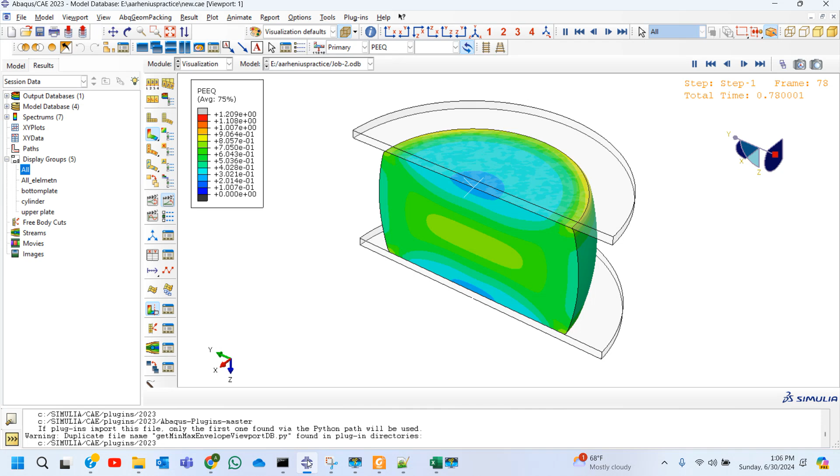Hello, this is Arsalan. I'm back again with a new project on modeling isothermal hot deformation behavior of any metal or alloy using a numerical approach based on VUHARD subroutine.

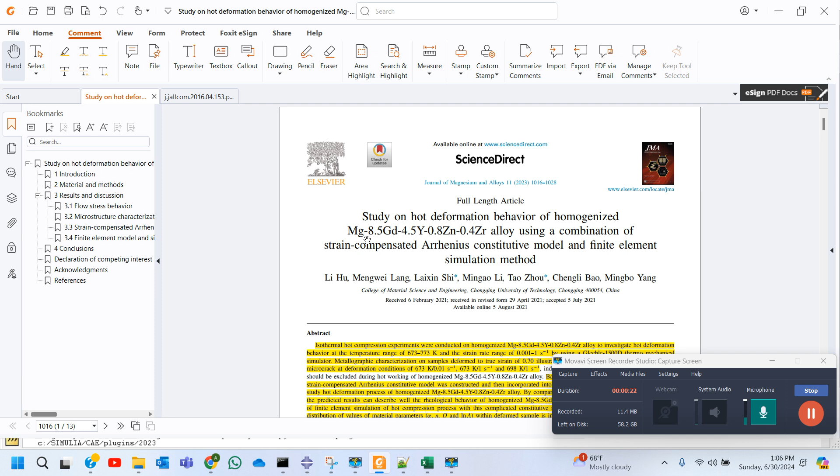So this is a reference paper that I'm using, and this is also a second reference paper that can be used to study the model. We all know that metals and alloys at high temperature experience some sort of strain softening as well as temperature softening. In order to model this temperature softening and strain rate softening, there is a model which we usually call the strain-compensated Arrhenius model.

This model is basically used to model the hot deformation behavior of any metal and alloy based on the strain compensation method. In this study, experimentally this can be modeled using a Gleeble 1500D thermo-mechanical simulator. And in ABAQUS, through numerical simulation, we have used a VUHARD subroutine, and the detail of this VUHARD subroutine is as follows.

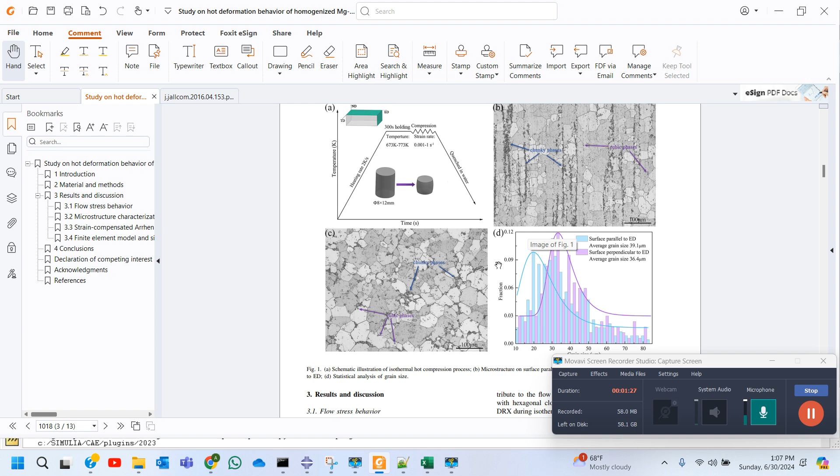That's why we need some sort of model, whether it is a Johnson Cook type that we need to modify, or we can use the strain-compensated Arrhenius model, which is already a validated model for modeling hot deformation behavior. In order to validate the study, first of all, we have made an Excel sheet. In the Excel sheet, we have entered all the formulas for the modeling. The values of these formulas all depend on the strain. So it's a strain compensated model.

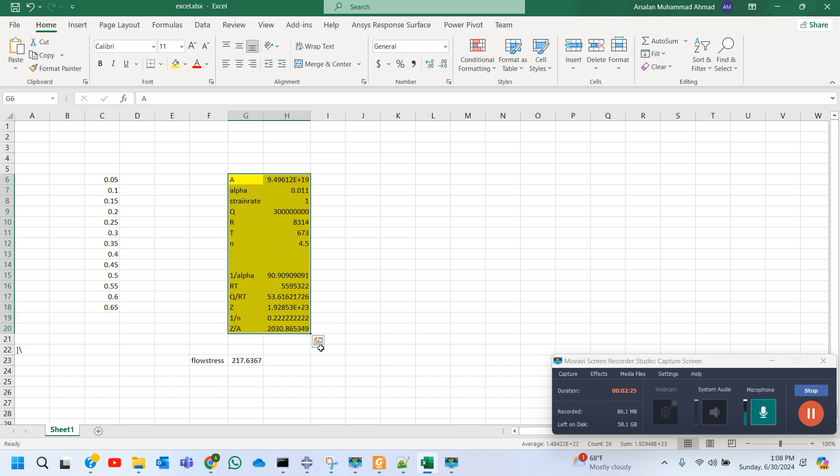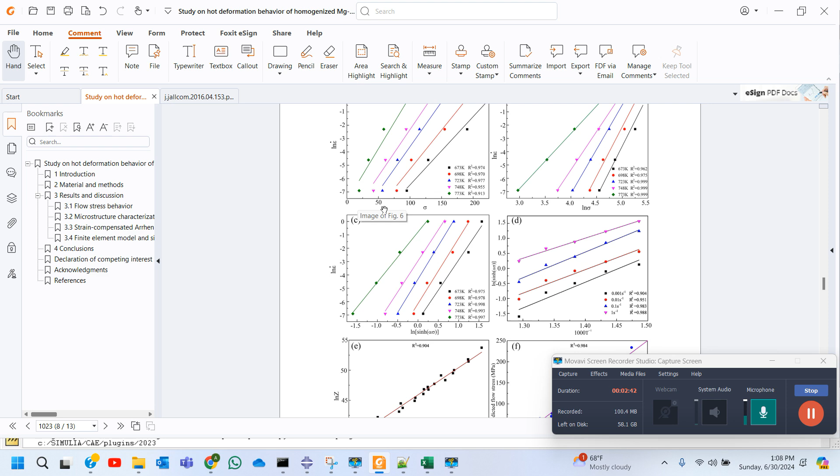So we need to measure all these parameters individually for different strains, and then check the flow stress behavior. In the next stage, you can see that this is basically the Arrhenius model, and in the Arrhenius model you have to find the values of all the parameters, like log of strain rate as a function of stress, n as a function of true strain, alpha as a function of true strain, Q as a function of true strain, and ln A as a function of true strain.

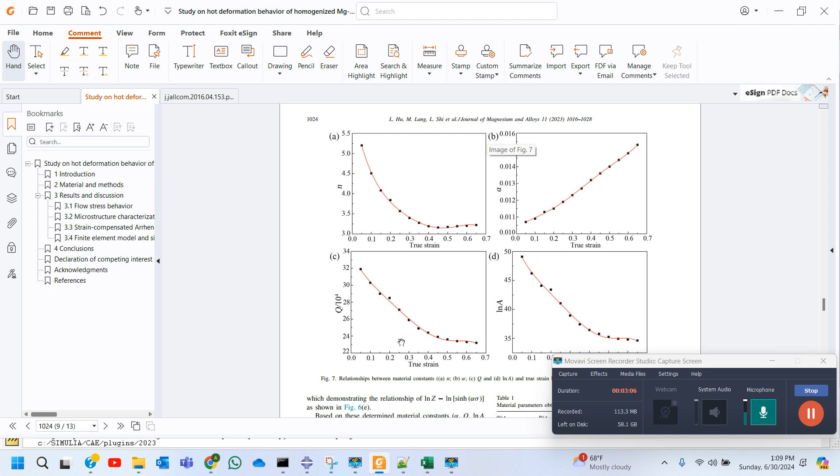So for different strains, we have to understand these parameters as functions of strain, and then we can put them in the formula, this formula over here, and then you can find the flow stress behavior. Numerically, we have checked this using a model for different strain rates.

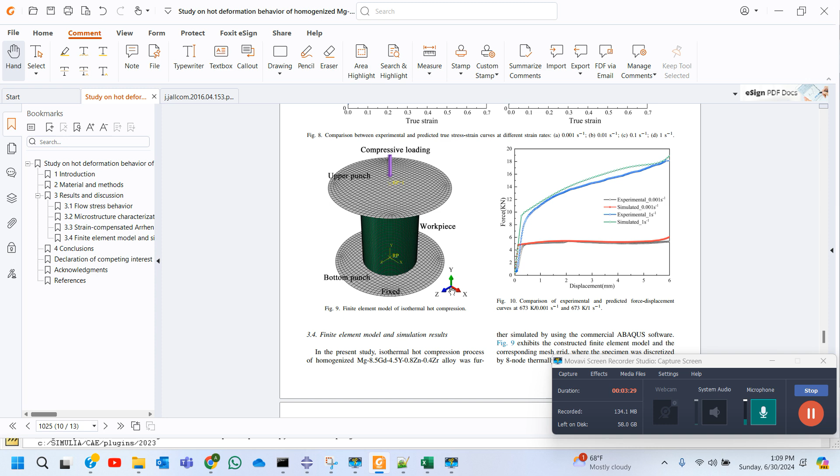You can see over here we have a normal cylinder, supported in place by two plates. The bottom plate is fixed, and through the upper plate we apply the top displacement. You can see the localized flow stress behavior as the cylinder is compressed. In the center there is a high flow of material, and the flow is localized at the center as a result of compression.

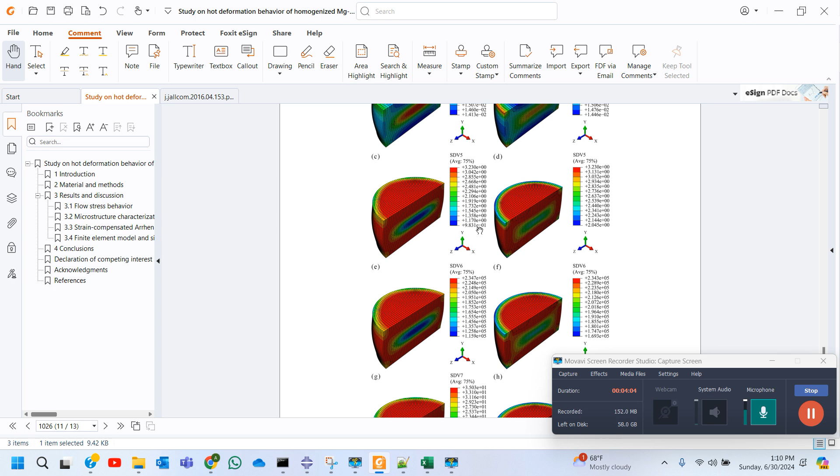This also can help us to identify dynamic recrystallization, which is the formation of new grains, and also in case of isothermal deformation, if you want to identify the area having a high flow of material, which is very crucial for material design, we can follow this subroutine.

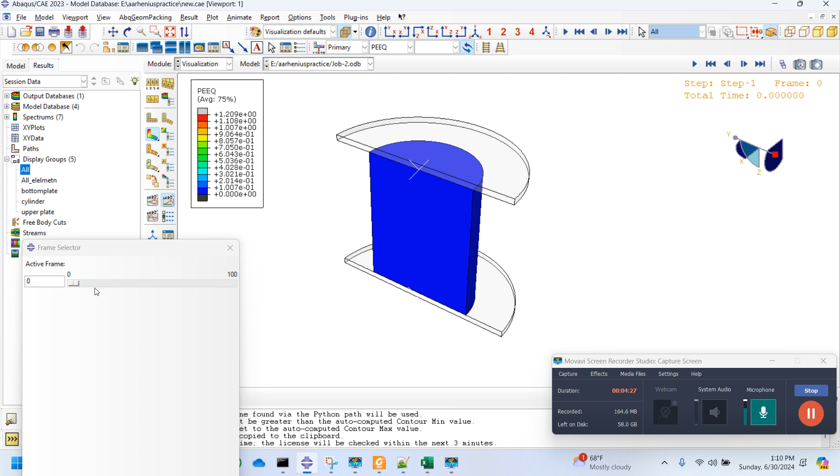So in the same case, what we have done, we have applied the displacement over here, and you can see as the material is increasing, you can see the formation of flow stress in the center, and as the material is fully compressed, you can see over here, we can see the high flow of material in the center. So this is basically the flow localization. So the top edges at the corner and the center experience a high flow of material. So that's why we can see the flow localization behavior inside the center.

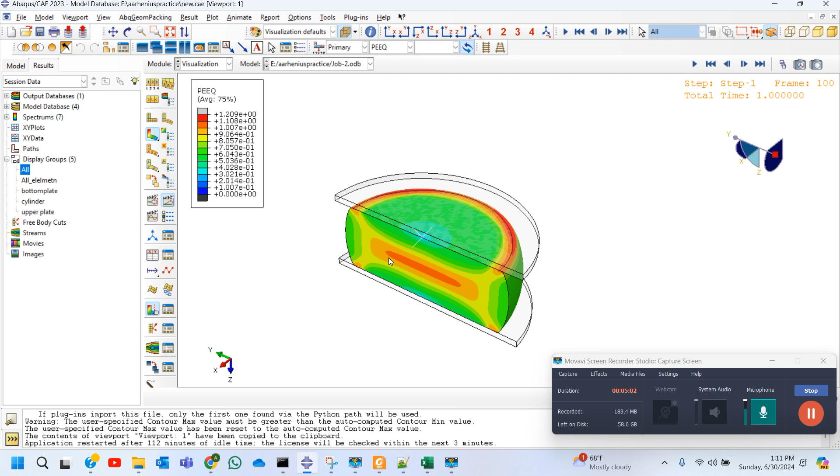Similarly, in the next stage we can see over here. Yes, in the paper we can see. Yes, now for the subroutine, and we can try this for a different strain. And in the subroutine, the procedure for UHARD and VUHARD is the same. Just we need to integrate in order for the Arrhenius compensated model.

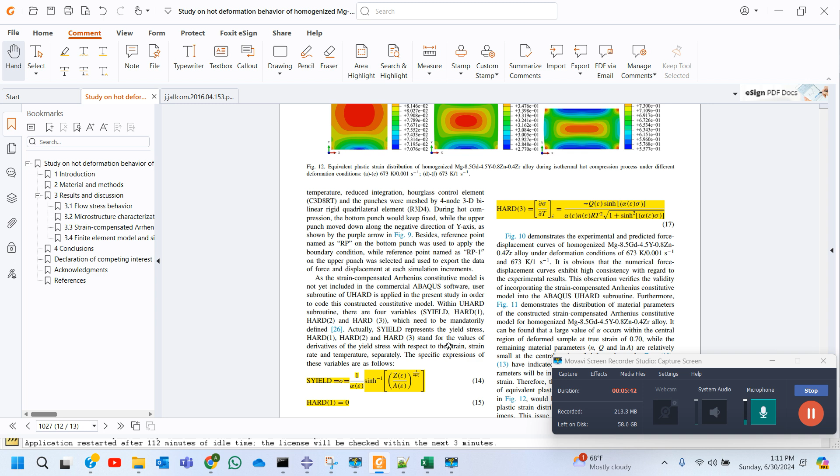Both in UHARD and VUHARD subroutine, we have to differentiate the stress or flow stress as a function of strain. First we need to integrate them. We need to differentiate with respect to strain, and in the third portion we need to differentiate it with respect to temperature in order to induce the temperature dependent softening. So equation 16 is basically strain rate softening, and equation 17 is basically the temperature based softening.

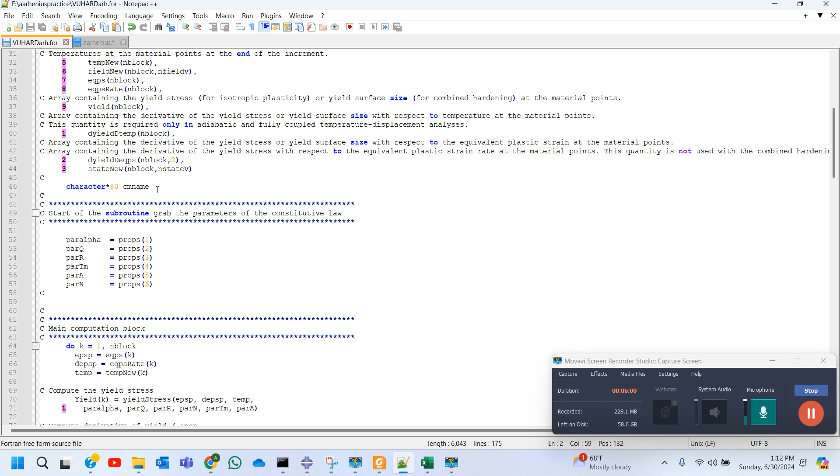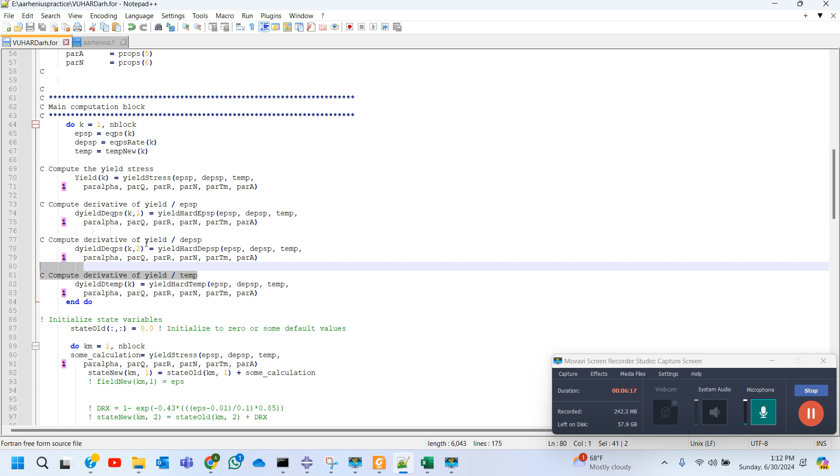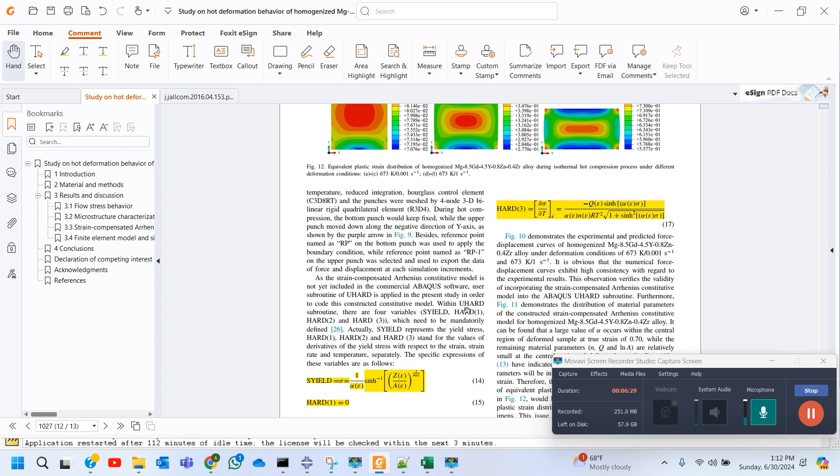So how it has been done, you can see over here. This is the Arrhenius subroutine. This is its interface, and then you need to differentiate with respect to stress, with respect to strain, with respect to strain rate, and then with respect to temperature. So in this subroutine, you will differentiate all of these parameters as given. So they have done it using the UHARD, and we have done it using VUHARD subroutine. Both yield the same results, just the numerical process is different.

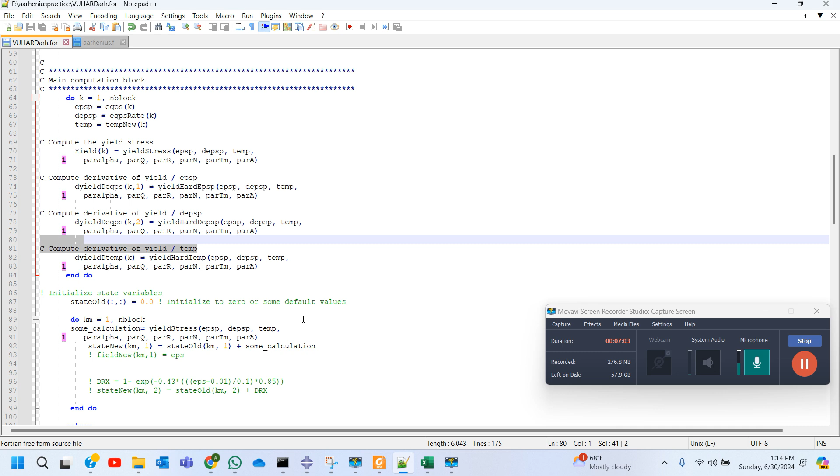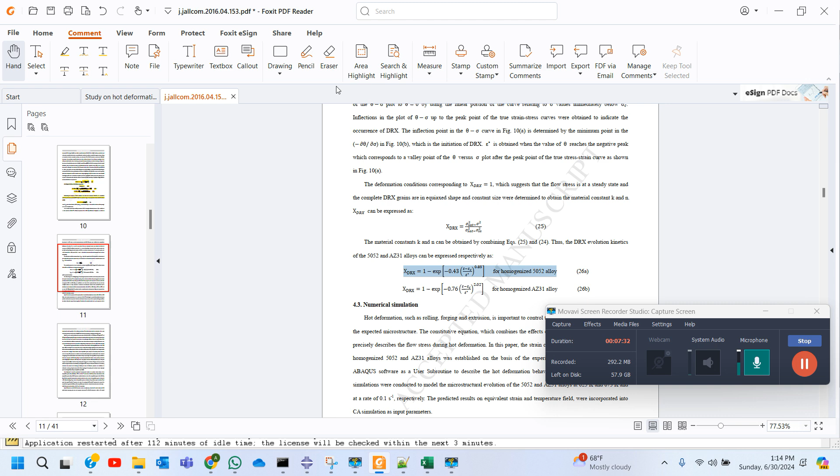And you can see for a different metal alloy, the formula is different, and it all depends on your value of critical strain and the material parameters K and N. So in the subroutine you can also see there is the solution dependent variable 3, which can give you an idea of the solution dependent variable inside this material, or inside this component.